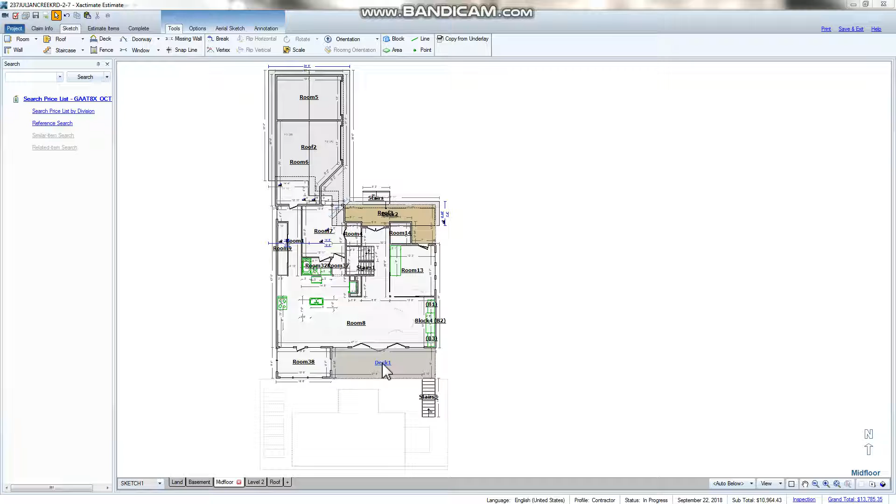On the first floor we've got a large living room and kitchen spanning the entire width of the house, a screened-in porch for three seasons use, and a deck that I don't intend on using for much more than just passage down to the pool. It's only large enough for traffic down to the pool, not really a functional deck for us.

It will be a solid surface, so I don't need to worry about rainwater getting underneath there. It'll have a slight pitch for runoff, and I'll show you an overhang above it in a minute.

This is a 16-foot accordion door that I've already purchased. This one panel stays movable like a fixed man door, while these other panels lock in place when you're not using them. So you can just use this single door, which looks like—actually, this is the exact door. This one panel is your normal man door, and as you unlock the different mechanisms, it folds back into a full 16-foot opening.

Kitchen—nice large kitchen, 21 by about 21, so about a square kitchen.

This is drawn in as pocket doors just because my sketch program doesn't have barn doors, but what we'd actually like is two intersecting barn doors that meet in this corner, so when they're retracted you have the visual field that all of this is one open space. The flooring will just be continuous through them.

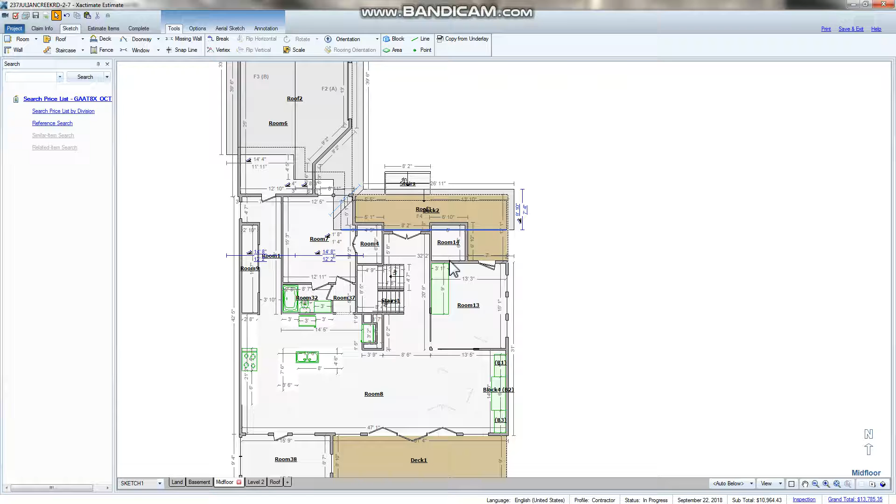Office, built-in desk, door to the front porch. This box here—you'll see it again on the next floor—is a future elevator shaft. I just want to make sure the house is livable for life, so if I ever need to put an elevator in, I can. I've dropped this shaft in right above the next space you'll see here in a second.

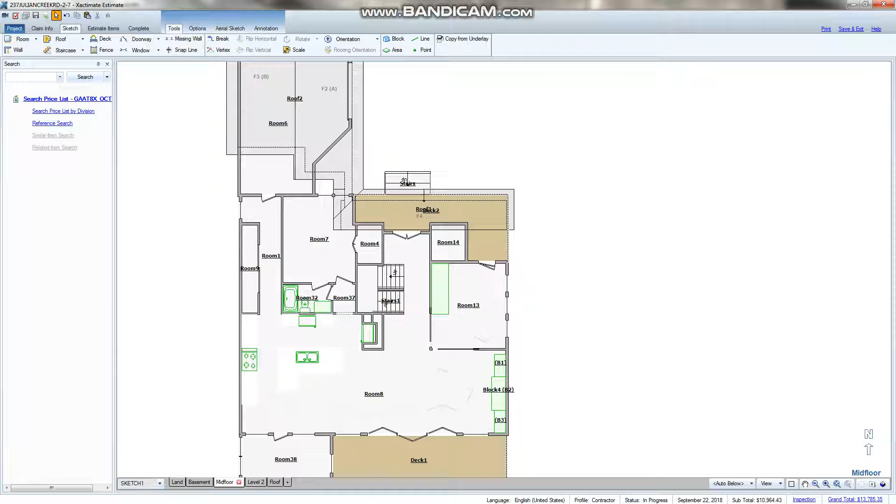This is a two-story stairwell, and there's an effect I'm looking for in the stairwell—let me find it. Sorry, here it is. So this is the effect I'm looking for in the stairwell.

We want a large second-story foyer with both of the stair landings visible, open from the second story down to the first floor. I'm actually going to have a raised section of the ceiling. But back to the first floor.

So that's the way the stairwell will look, open from the second floor right here. I'm a little concerned I haven't left quite enough room for the stairwell, but I've got a little room to increase that size if we need to.

In the kitchen, this little bump-out is housing a freezer, but it's also for the support I'll need for an LVL that spans over here, so I can have little drop boxes for my barn doors.

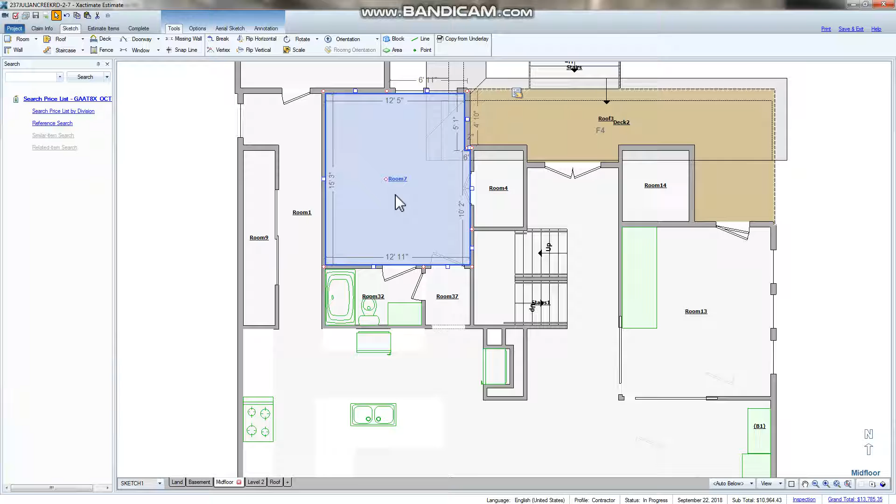This is the passageway to a bedroom that'll actually be written up as a dining room on the plans, with its own closet. There's a bathroom that will be the first floor bathroom as well as this bedroom's private bath.

Hallway from the garage has the pantry in it. It's a long, wide pantry that's not very deep, because instead of needing to walk into it, I just want to be able to walk up to it.

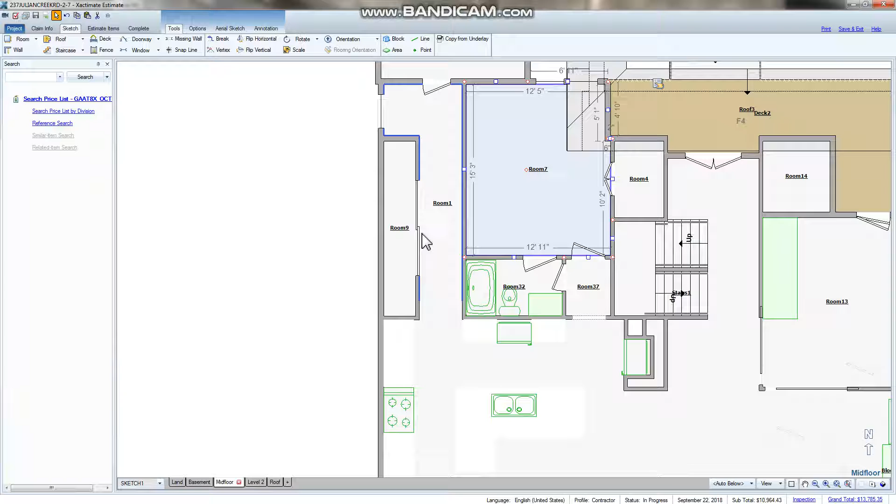Even though these are drawn in as sliding doors, they would also be barn doors, revealing a 3-foot deep, 15-foot wide pantry.

Then this is the garage with lots of extra little room up in this area, sort of a mudroom area.